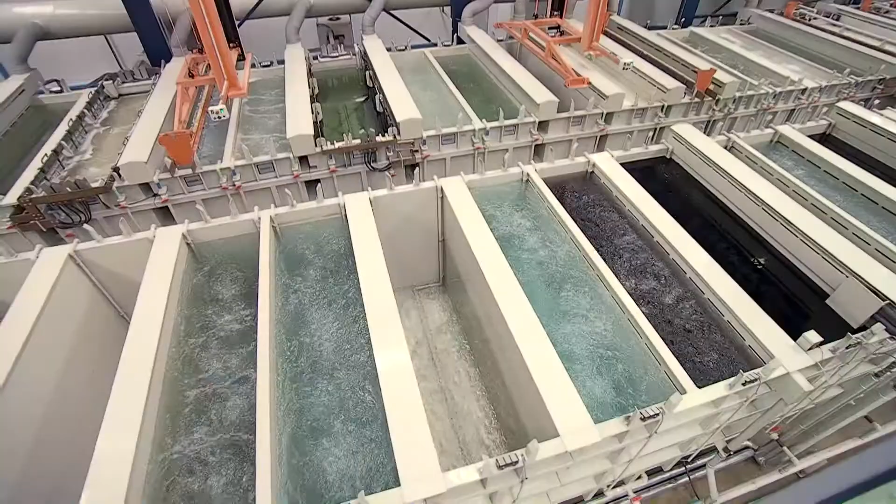Merging its 65-year sectoral experience under the roof of Sampa in 1994, the company specializing in heavy vehicle spare parts has established cooperation with international brands and has confidently adopted as its mission the manufacturing and service quality forever.

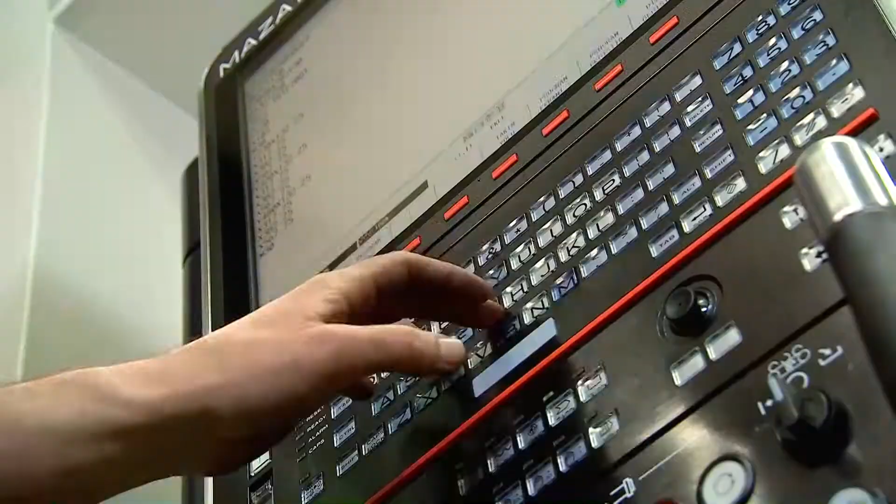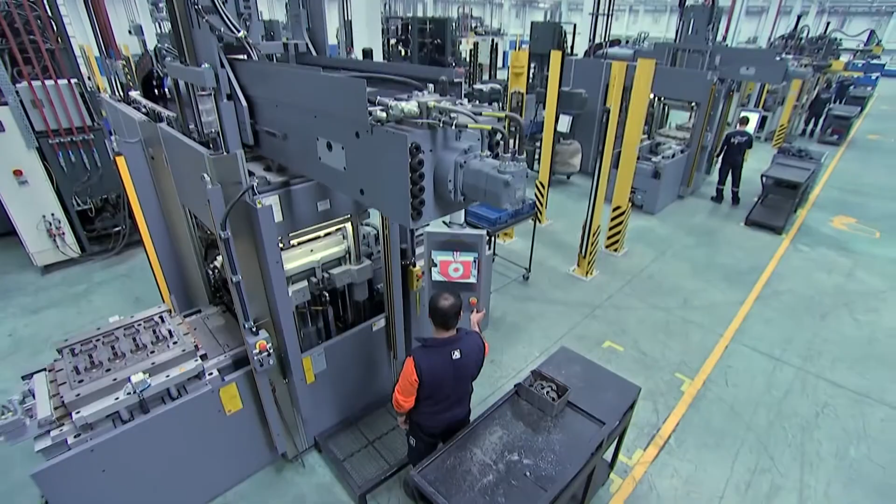700,000 square feet of production area. 1,080 employees, 144 of whom are engineers and technicians. Production for 18 different brands of European and American origin. Modern production units equipped with cutting-edge technology, consisting of more than 3,300 machinery. Offices in the USA, Germany, Dubai, Russia, China, Kazakhstan, and Ireland.

We promise to serve you many products with the best prices, highest quality, and the speediest due dates, under the supervision of an R&D Center which competes with the future, and with fully equipped manufacturing units which combine different and complicated production models under the same roof.

Let's now see the world of Sampa, opening its window to the future.

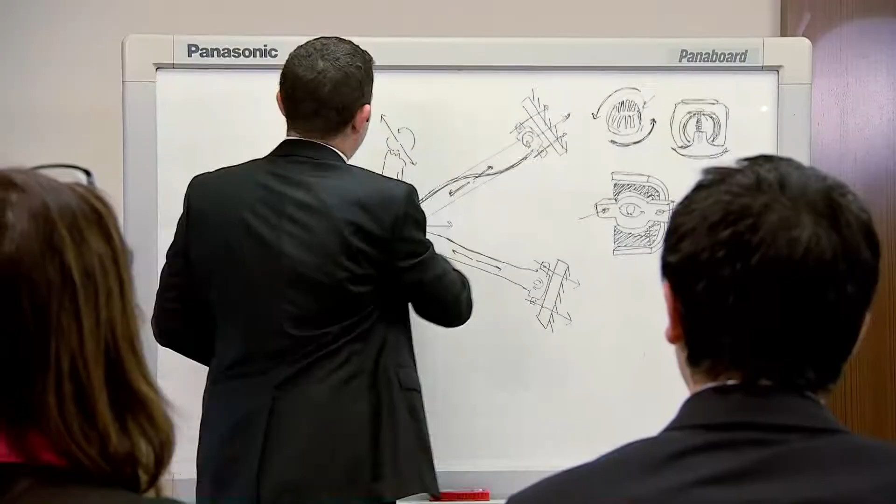Requests are transmitted to Sampa through OEM or aftermarket. It can be transmitted through OEM as projects which have ready technical documentation, or with the current structure to be developed, improved, or as joint venture projects which will be designed from scratch. Demands from aftermarket are actually carried out in the world of Sampa on the basis of advanced product realization by reverse engineering.

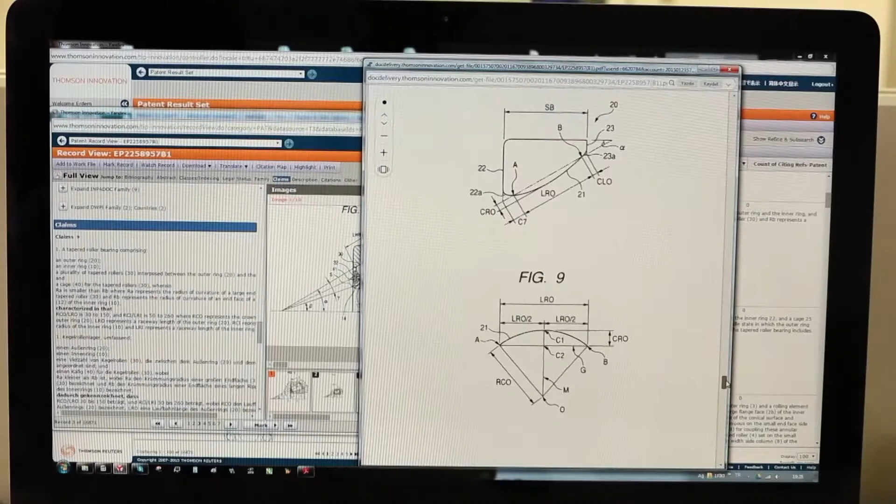The teams of specialists make extra patent investigations with the program named Thomson Innovation. If the product is patented, the design is submitted to the R&D department for revision and development to take it out of patent protection scope.

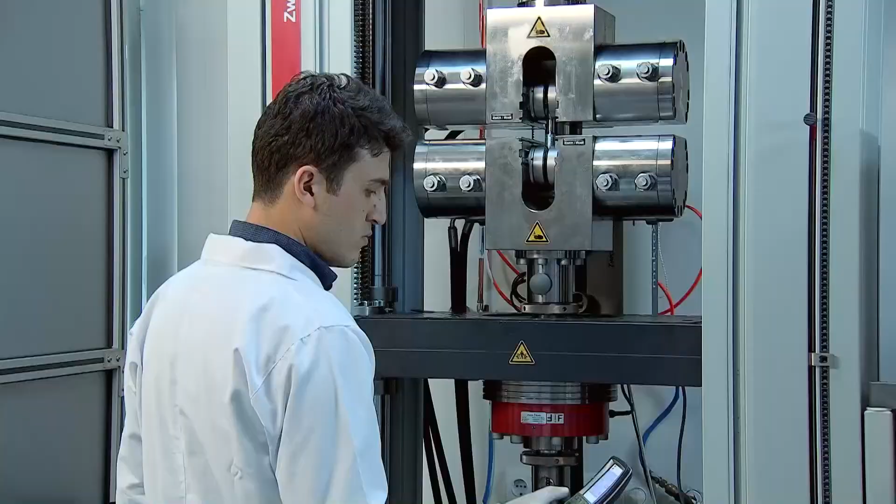One of the most developed R&D centers of the country: a 25,000 square foot office and laboratories where 77 scientists work, apart from the quality control laboratories established in manufacturing plants. 2.5% of the turnover is specially reserved for the R&D Center, which is accomplished with an investment of $9 million.

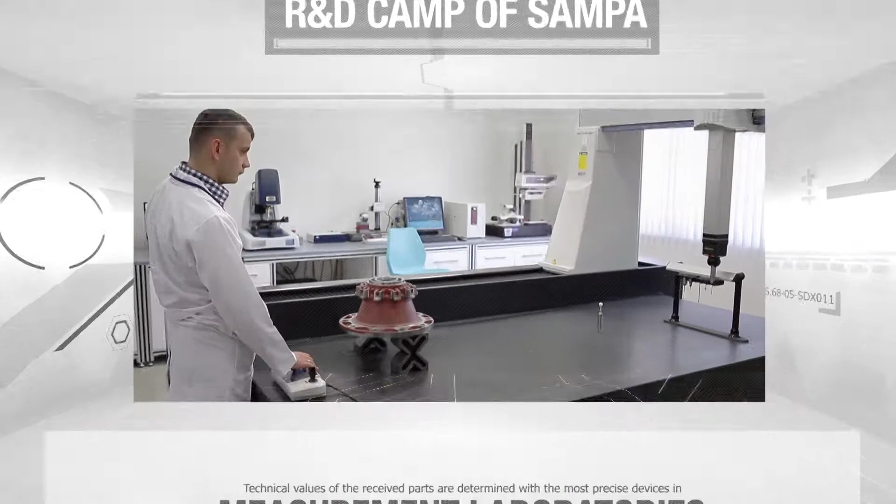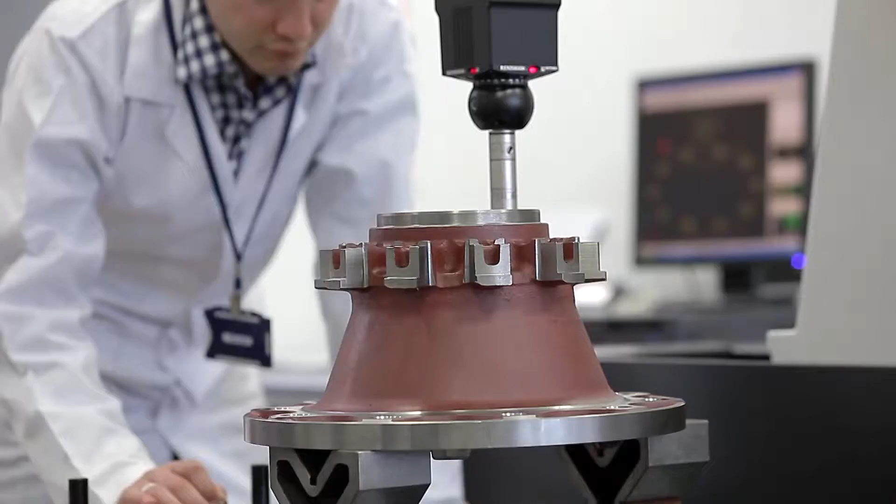Technical values of the received parts are determined with the most precise devices in measurement laboratories. Material characterization of the products is performed mechanically.

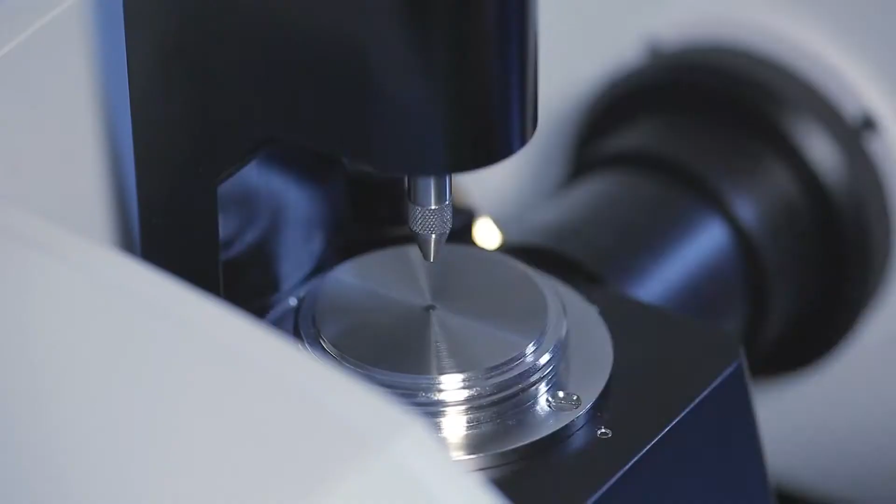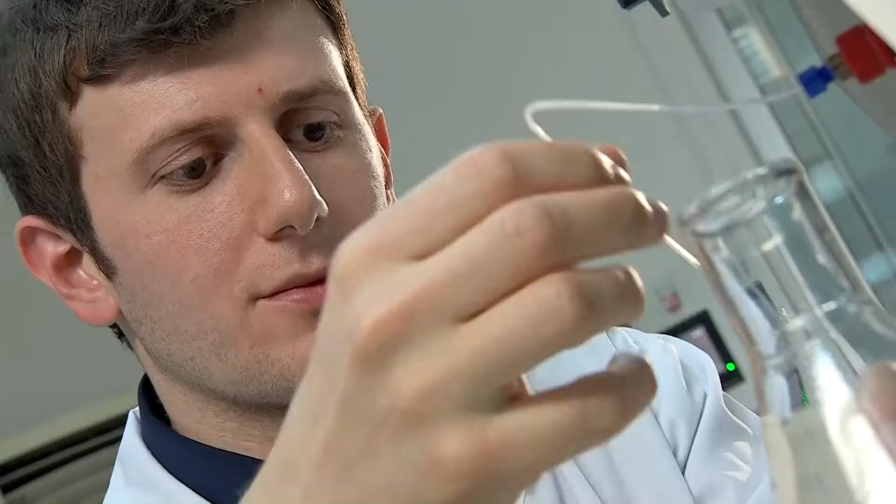If current material data is available on the CES Selector program, such materials are preferred. If new materials are required as a result of analysis, then new material designs are made in order to develop the performance of the products.

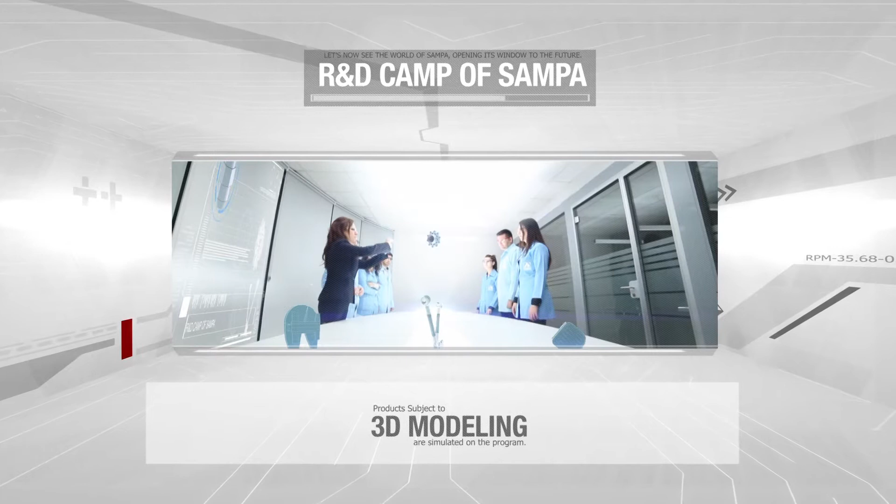R&D engineers analyze the results provided by the Measurement and Material Laboratory. Products subject to 3D modeling are simulated on the program. Thus, material and product design is verified.

Any obtained data is submitted to the engineering unit, and technical specifications and PPAP files are prepared.

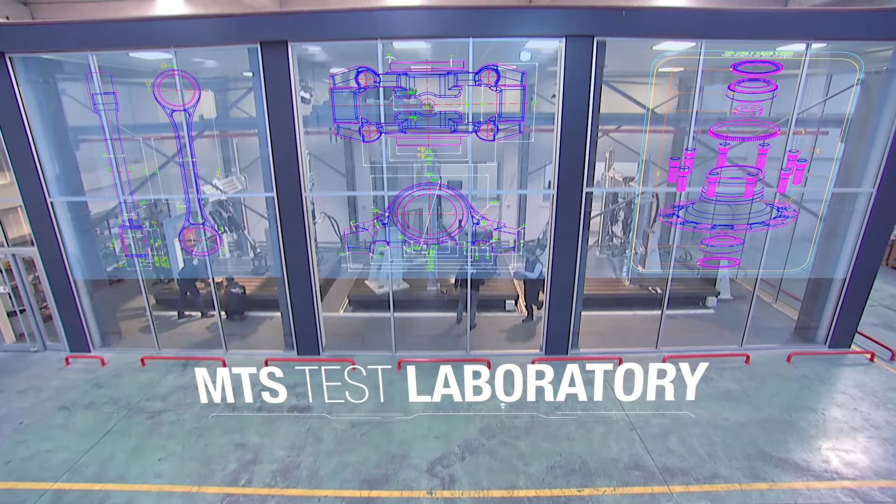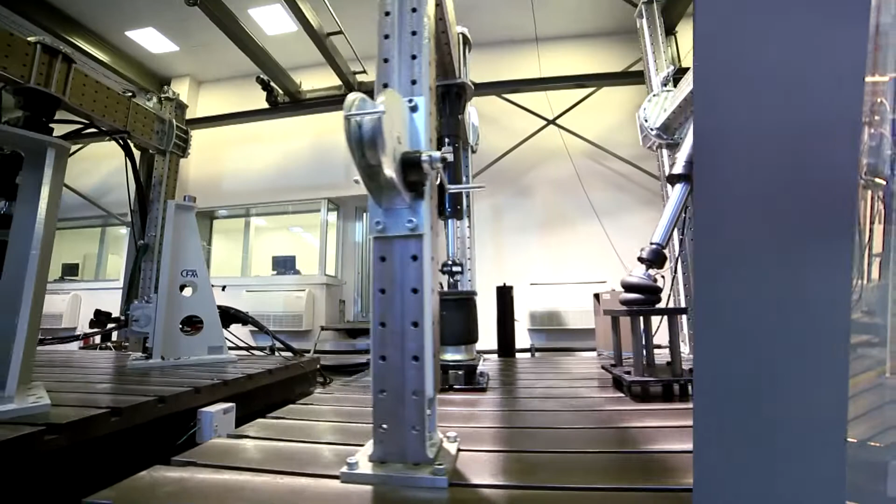Dynamic characterization of the product, which is subject to performance testing in MTS devices, is carried out by taking original operating conditions and simulation data into consideration. Dynamic characterization results here constitute data for benchmark.

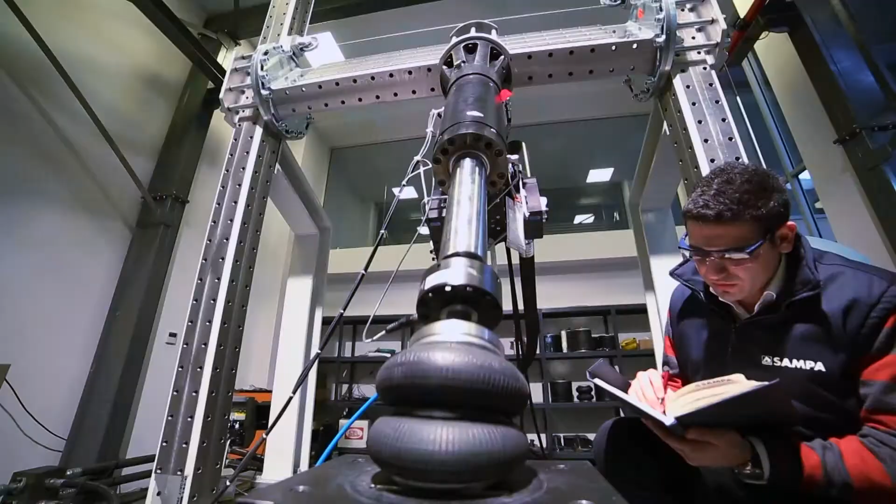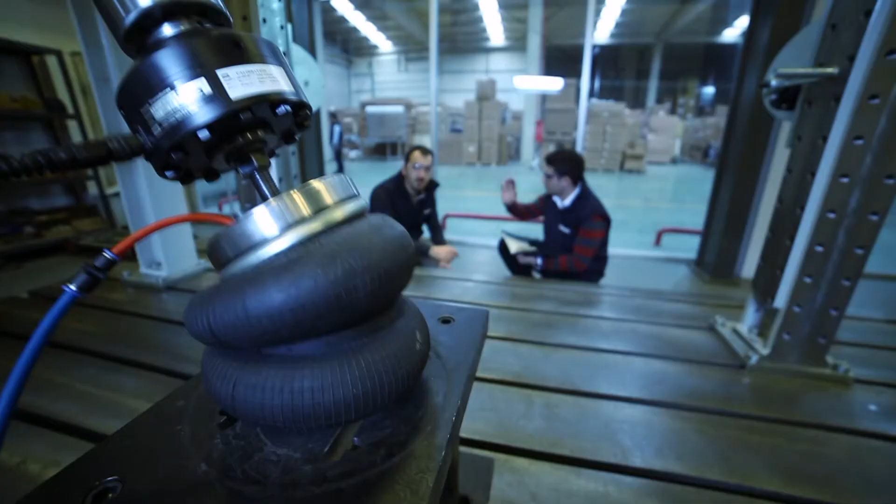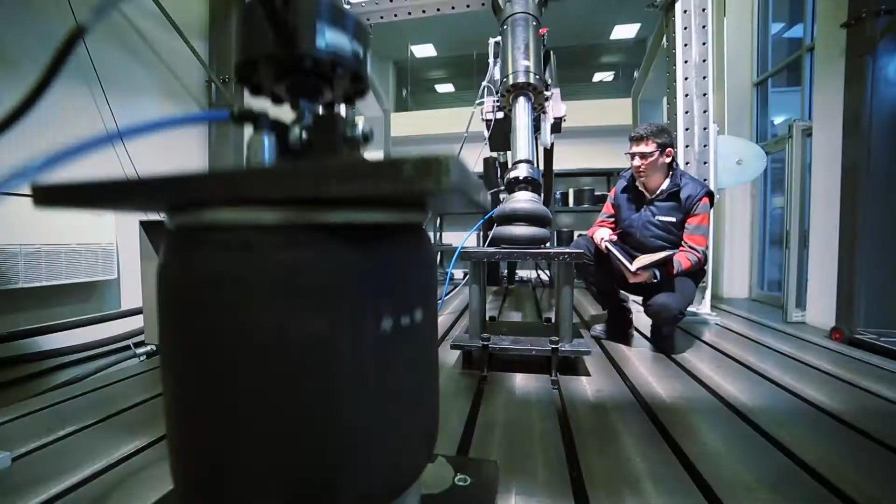Molding and process designs are realized for verified product designs. If the design is verified, startup is provided for the production. If there is a need for a prototype realization due to customers' expectations, prototype production for the product is realized with startup.

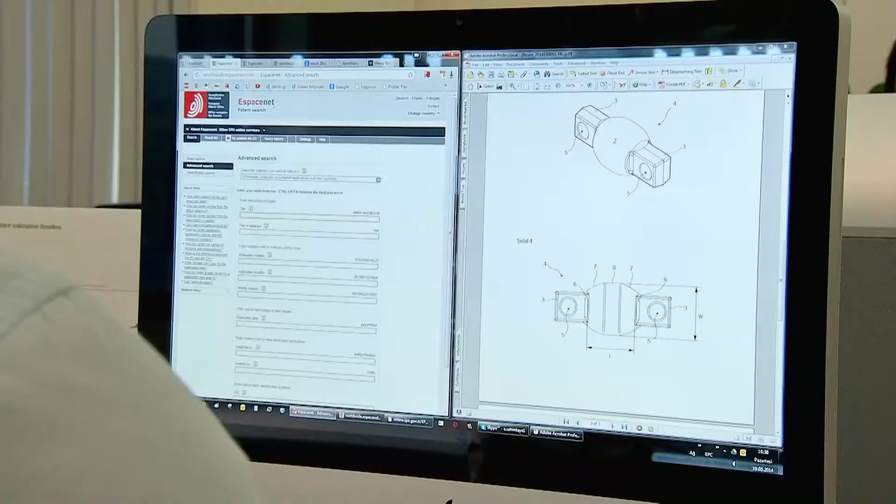Results obtained from dynamic test laboratories and design verification results are compared, and it is quantitatively revealed whether the design criteria and customer expectations are satisfied.

A benchmark report is created by comparing the test results of the original sample and the test results of the prototype product. These results are the commencement of the following phase. Verified or developed designs or products are on standby for production in mass production units.

Charming machinery, exciting digital panels, cutting-edge technology, and a gigantic production complex. Raw material input required for mass production is commenced through raw material supply from global partners through supply chain management.

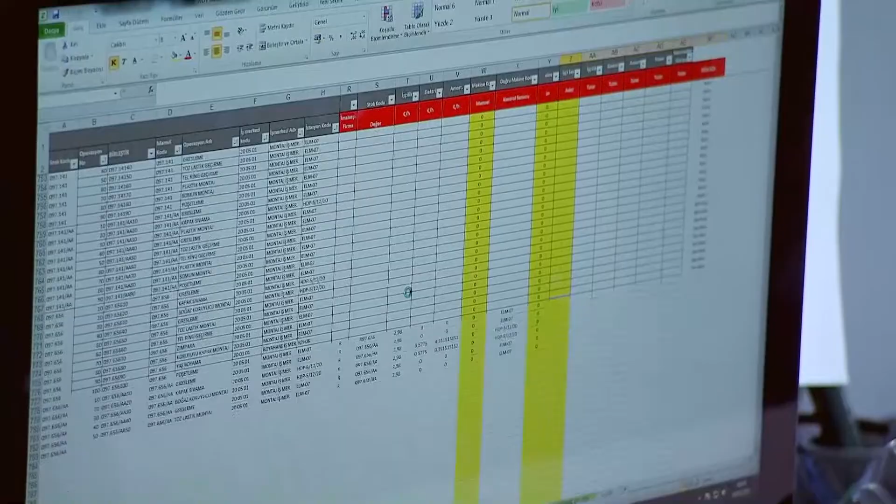Dream feeds the reality. The wheel starts turning when the dreams are transformed into a concrete goal: producing, supplying, and delivering, giving confidence at each step. Sampa has designed its production units with technology and quality focus too.

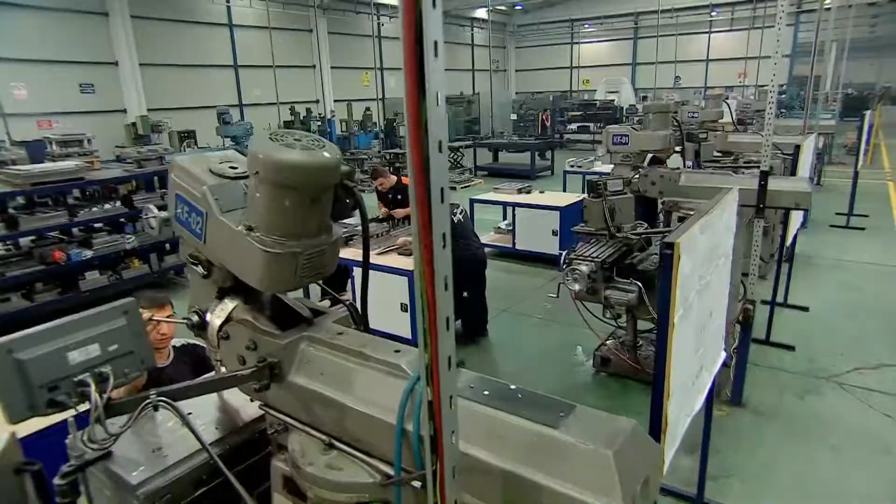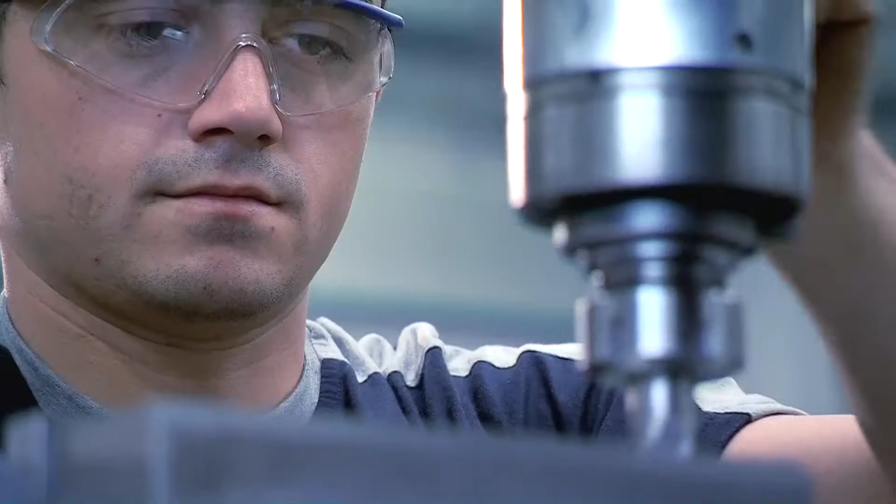The first step of the system is taken according to the directions provided by the R&D department and molding room. Relevant product mold, apparatus, or auxiliary equipment are tracked by mold product definition report and notification mails.

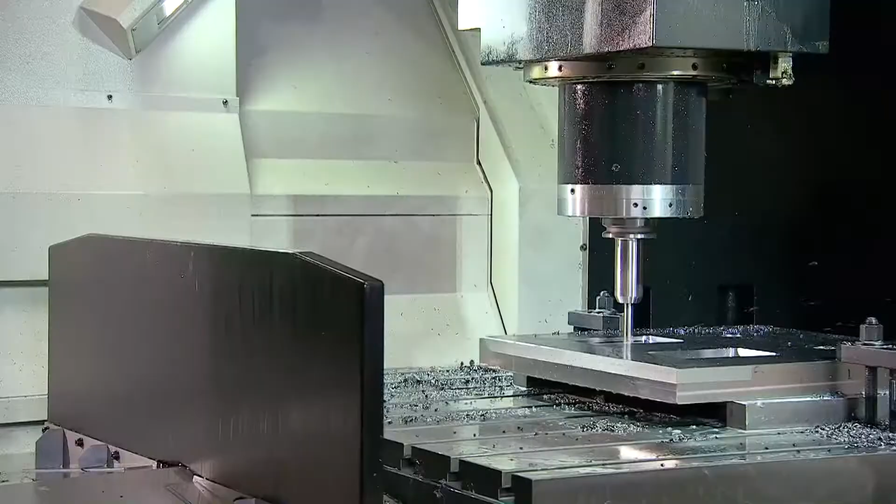Suitable steels are determined according to the type of mold to be produced, and molds in compliance with the specifications are produced. The result? If the products are suitable, the mold is delivered. If not, they are submitted to molding again for performing required corrections.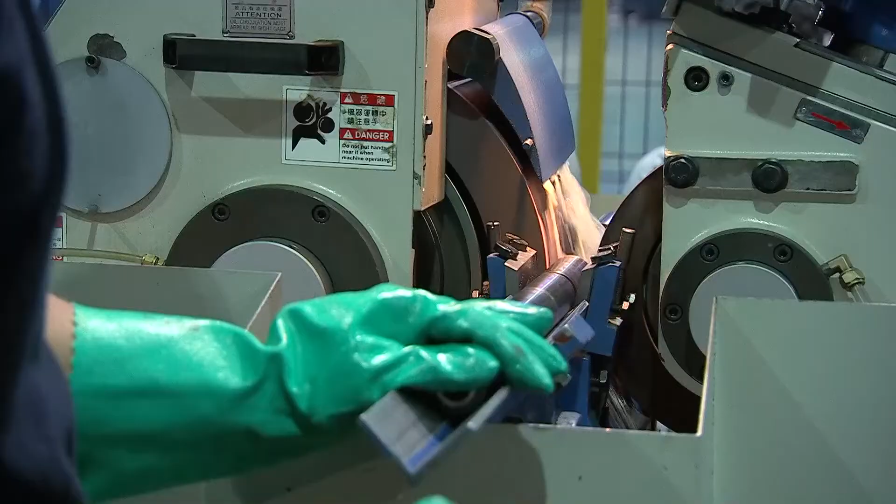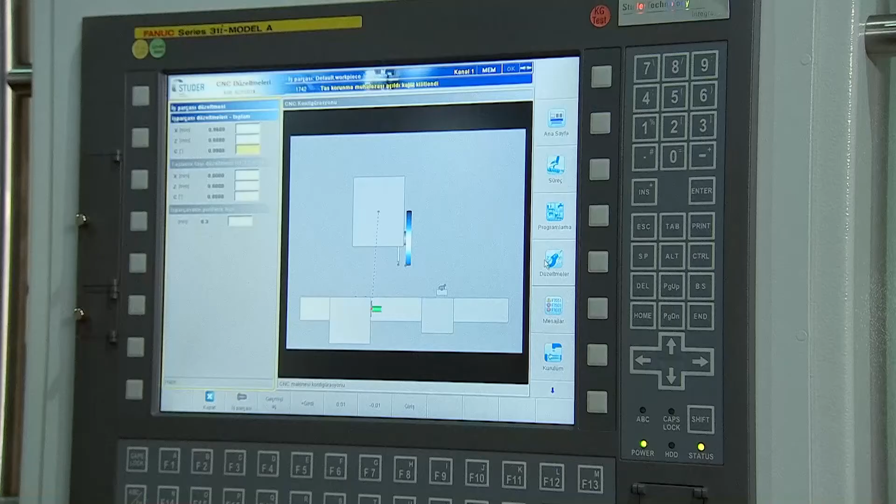Machinery, a magic created by humans during their adventure in the world. These mechanical fellows of the manufacturers are integrated with digital technology, and each step toward production is realized with a ceremony at Sampa.

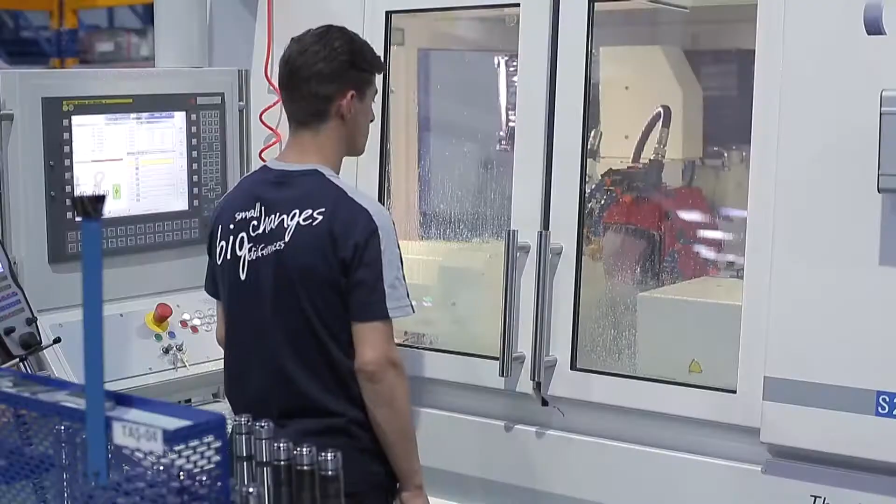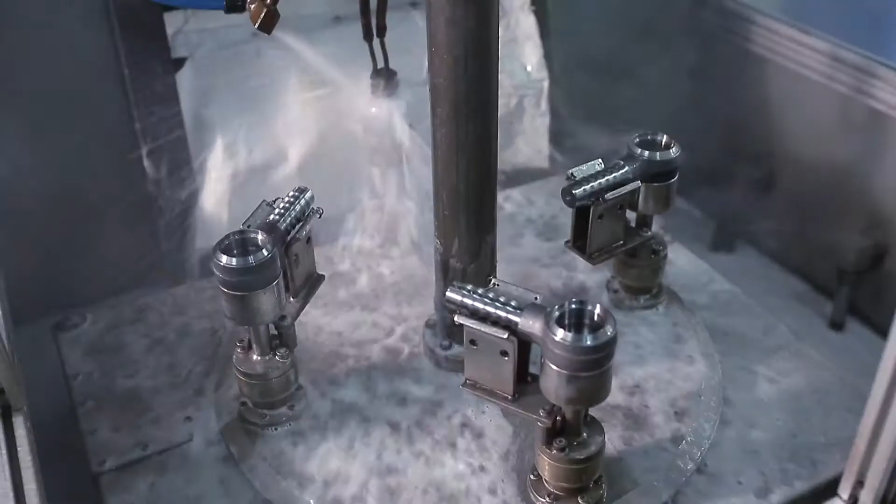Upon material input, quality control verification and preliminary preparation is carried out according to the CNC lathe plan. The initial product is machined upon starting up the prepared program, and dimensions are checked without removing the piece from the lathe. Upon performance of the measurements according to the process picture by the quality control unit, mass production is commenced upon obtaining verification.

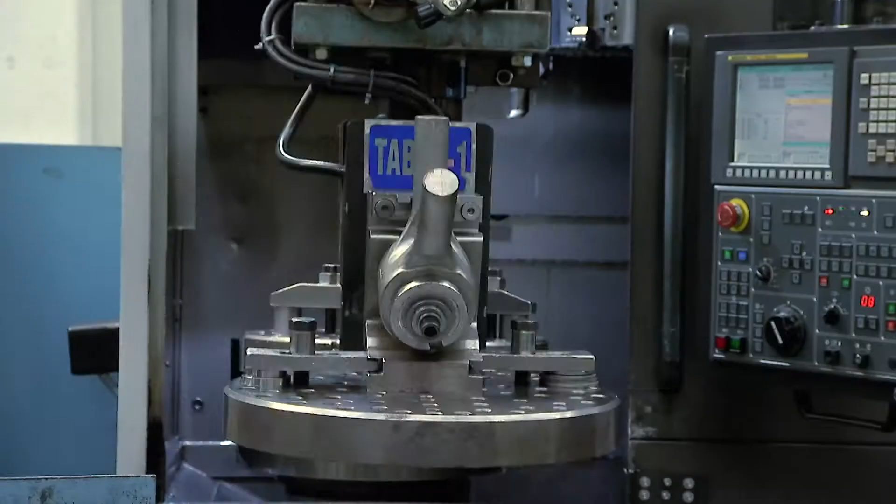The procedure, which is checked precisely at each stage at Sampa, is carried out as usual, naturally, by the teams who know what to do and where to do it.

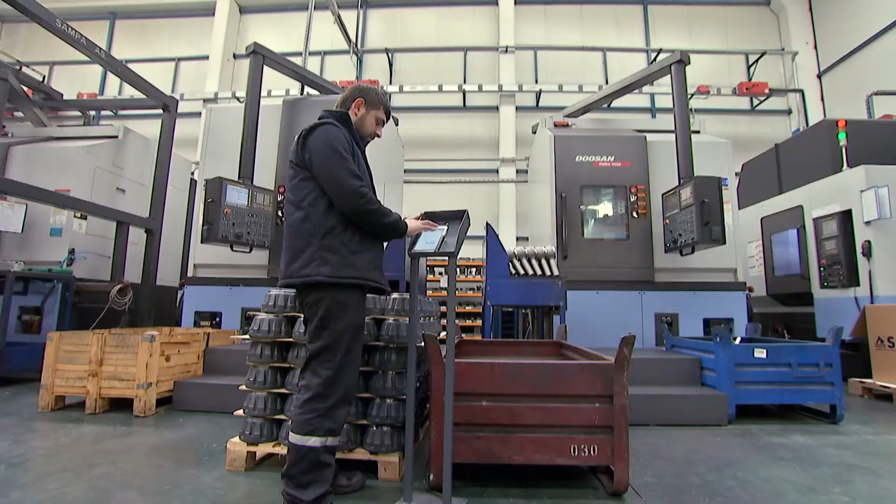Sampa uses SAP MII, the Manufacturing Integration and Intelligence module of SAP, which contains production tracking, machinery layout, and maintenance forms in order to ensure continuity of this healthy operation.

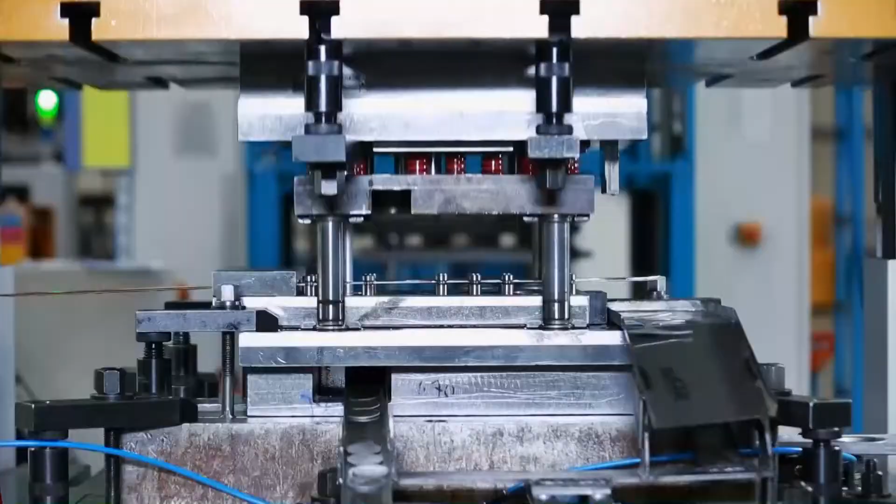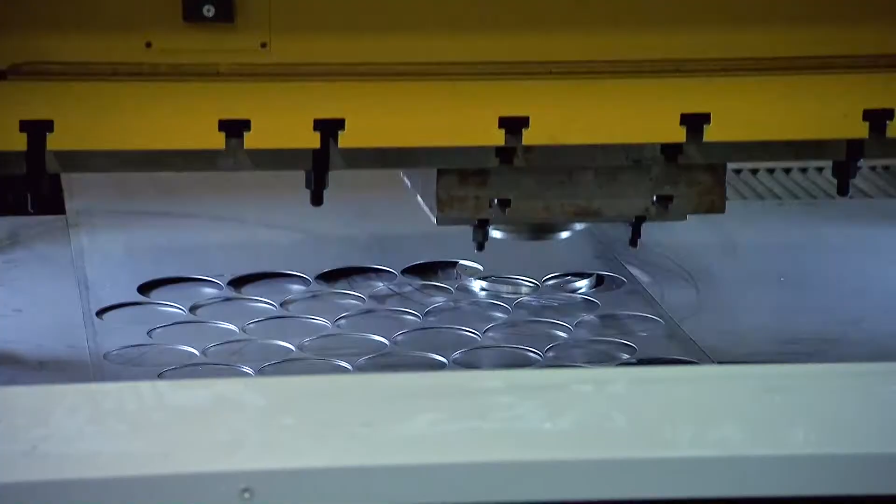Suitable plate or rolled metal sheet is manufactured for production items included in the planning, according to a cutting plan prepared based on quantity and mold. Input productions in the work order are provided to the operator, and processing is started to shape the metal sheet.

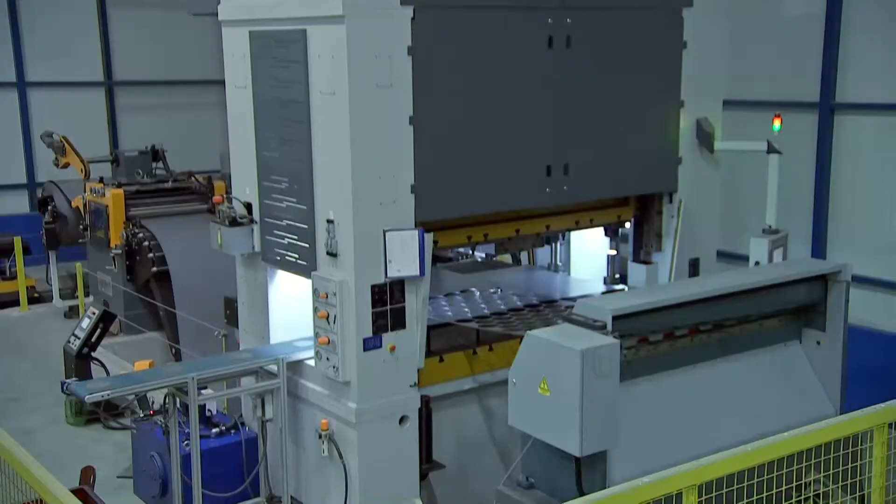Periodical quality controls are not skipped during production. The final result is obtained by connecting other molds to the respective presses according to the route of the product. Here, the operator completes production tracking forms after each process. Completed products are delivered to the warehouse upon being subjected to a final check.

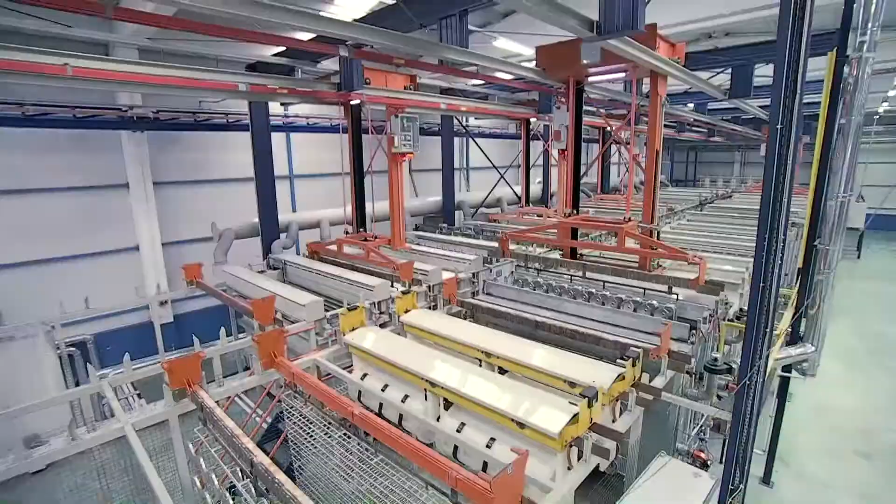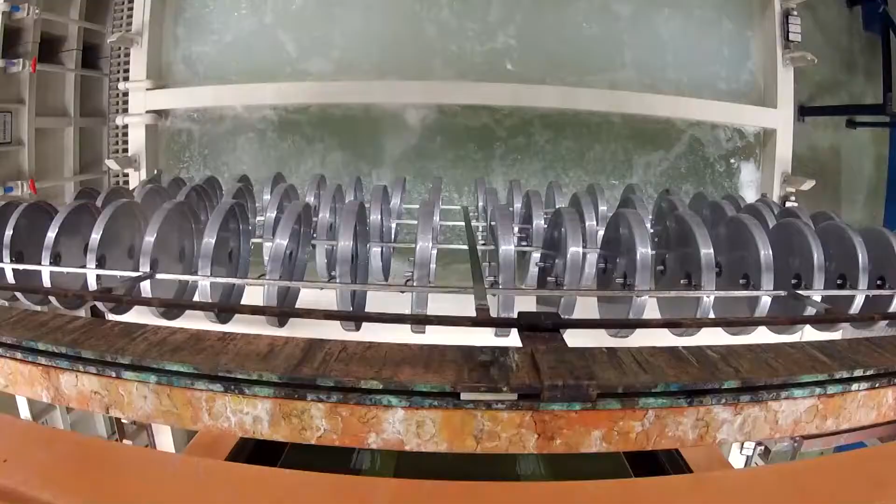An extensive surface finishing facility, comprising zinc phosphate, iron phosphate, alkali zinc, zinc nickel, sandblasting, chemical paint, and degreasing machinery, is arranged with emphasis placed on environmental, work, and worker health, like in other machinery groups of sampa.

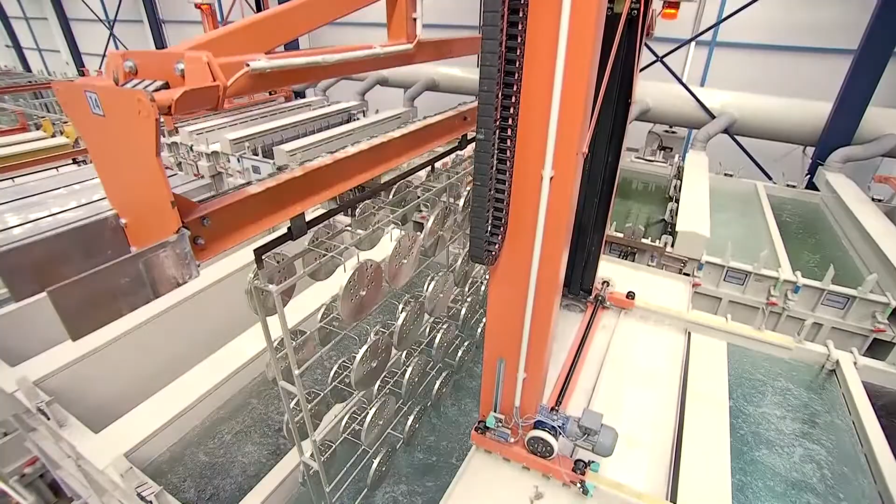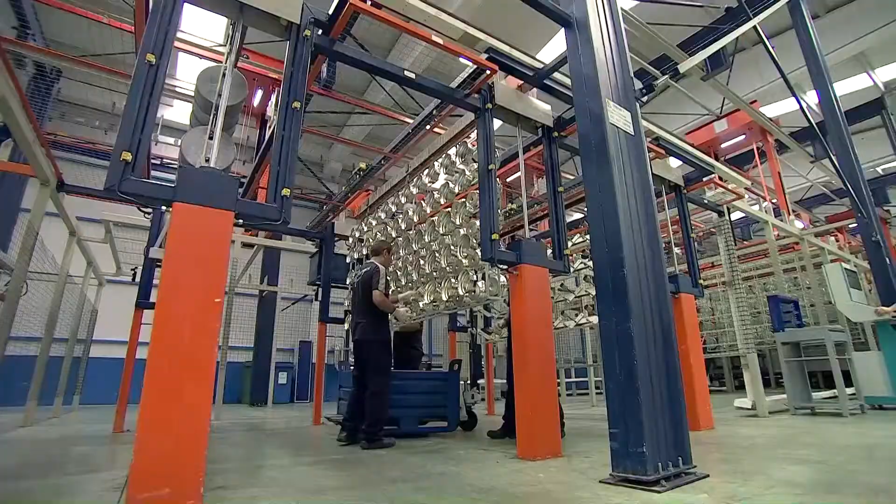Using the leading coating chemicals of the world, sampa works with a maximum corrosion resistance goal for its automotive products. It can perform salt tests, coating thickness measurement, and material analysis in the laboratory it has established in order to check the standard and keep it at the utmost level.

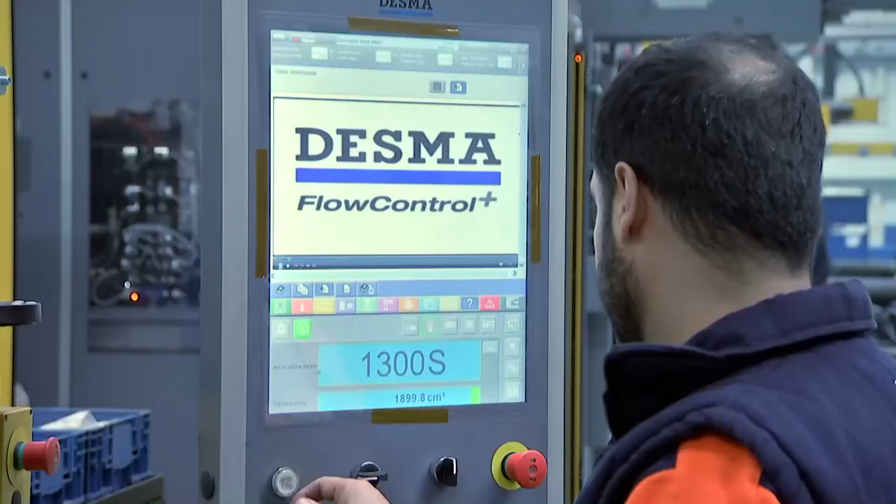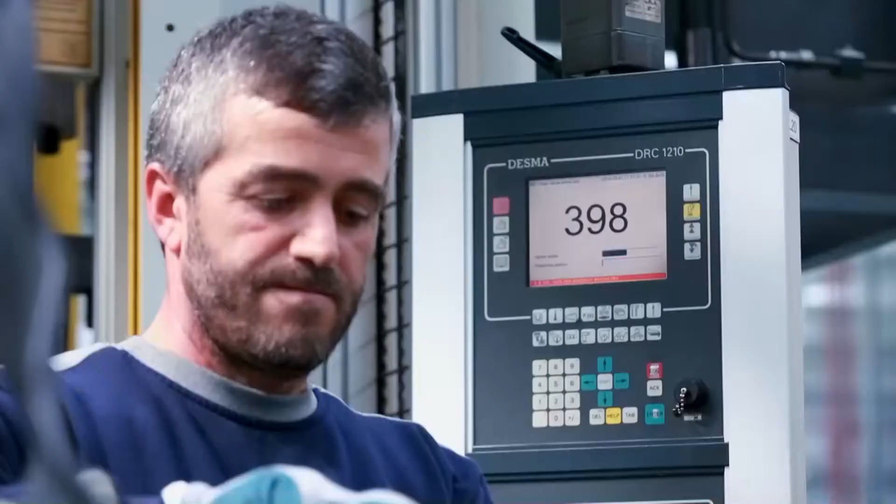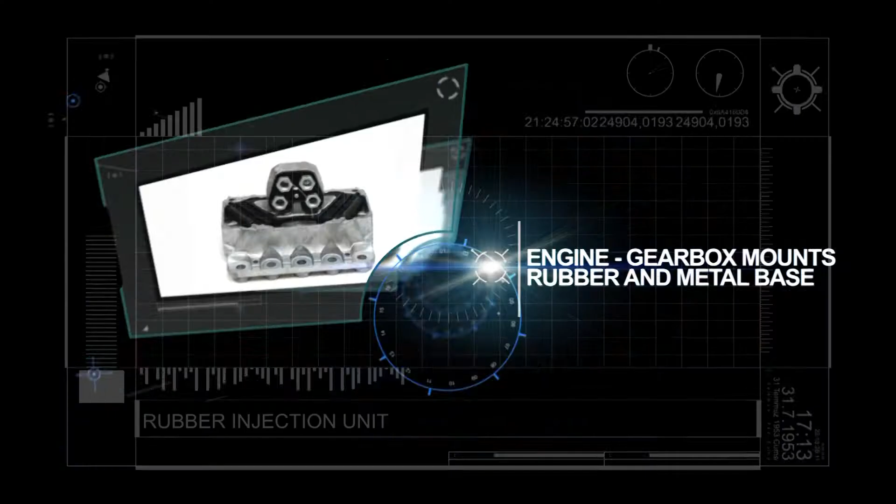On rubber injection molding machinery, product molding conditions are recorded in memory, and a ready-to-use program is created for future operations on injection machinery, which are connected with molds at temperatures of 320 to 338 degrees Fahrenheit. Machinery settings are performed according to type of compound, product weight, and mold runner system for new products.

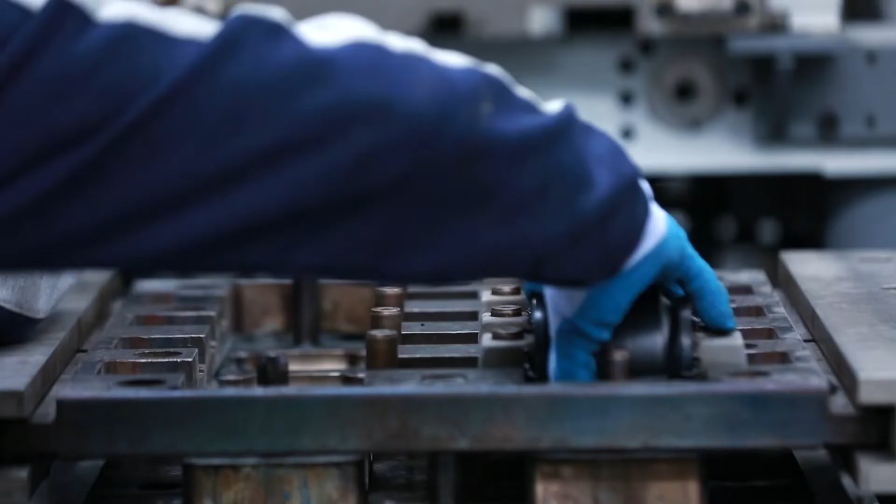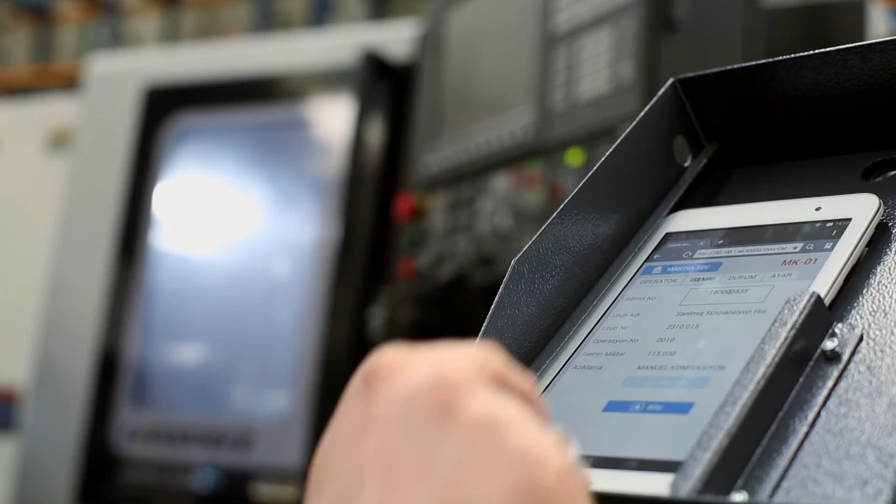Semi-finished products, which are subjected to surface finishing, are molded following machinery settings and subjected to verification by quality control. Upon verification, the product, molded in quantities according to the work order, is delivered to other production lines for the specified operations.

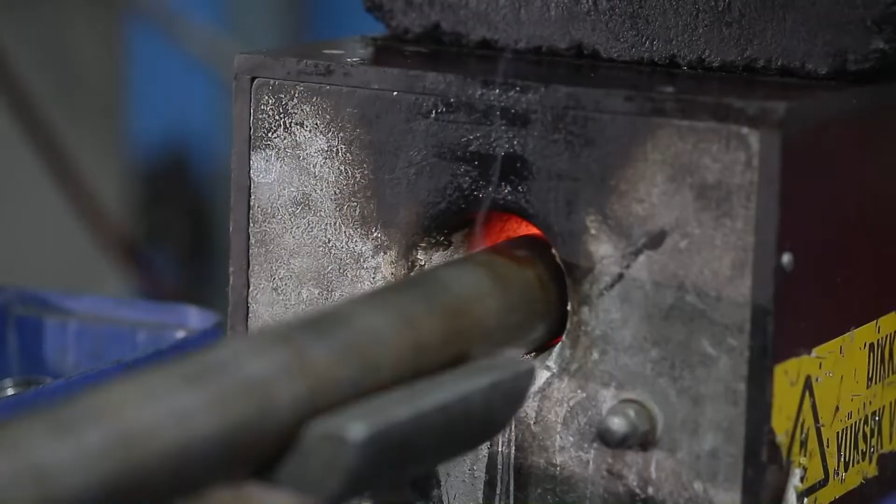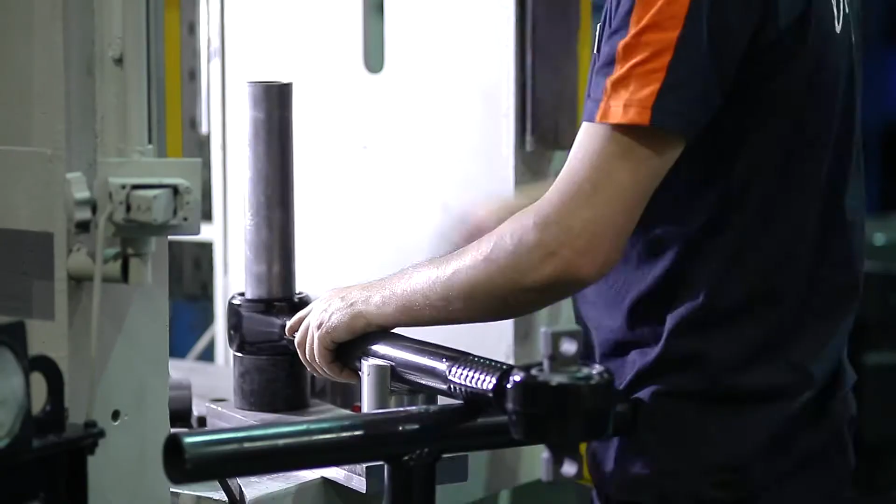Pieces delivered from different production units are shaped at the sampa V-arm department. Diameter and rear section processing is realized during the rear section processing and main processing phases of the V-arm. For centering, products are connected to the drilling bench using suitable tools. The tie rod body is subjected to centering following diameter and rear section processing.

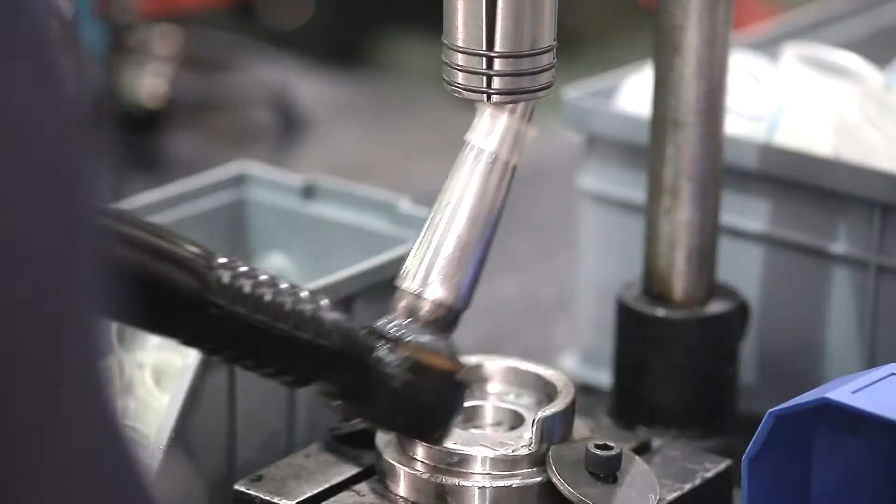Interior diameter hardening process is carried out on the induction bench following tip processing.

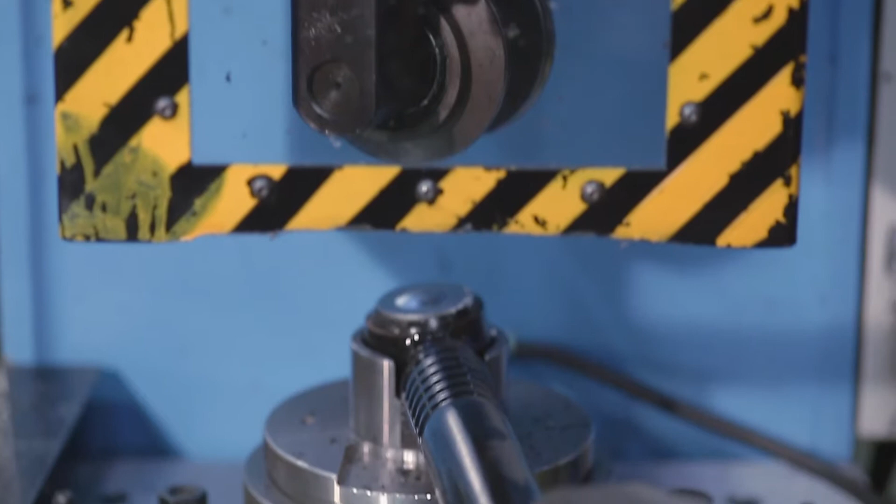The procedure, which is checked precisely at each stage at sampa, is carried out as usual, naturally, by the teams who know what to do and where to do it.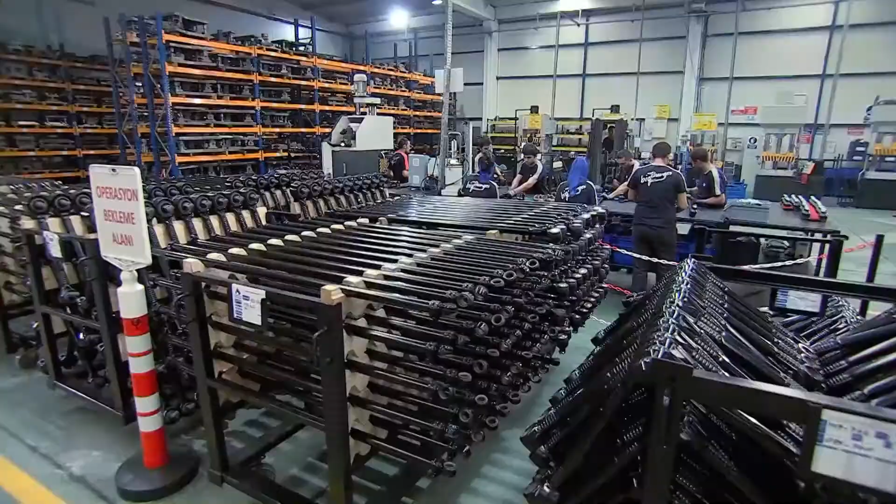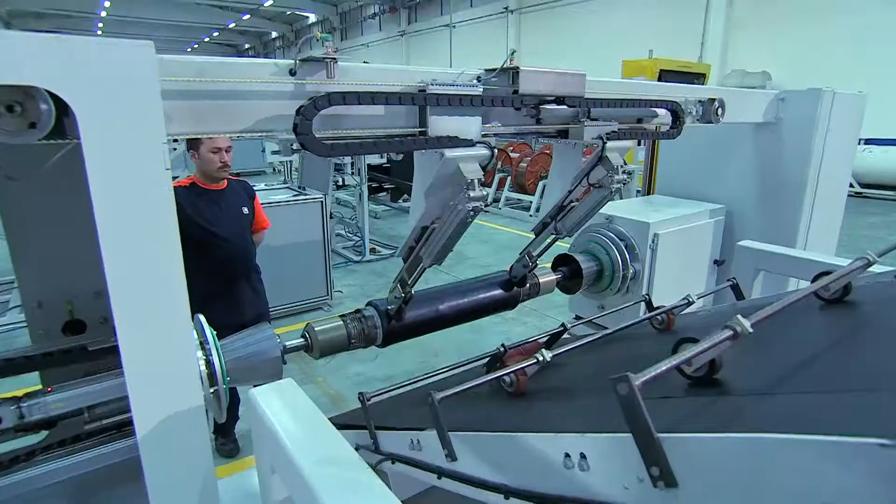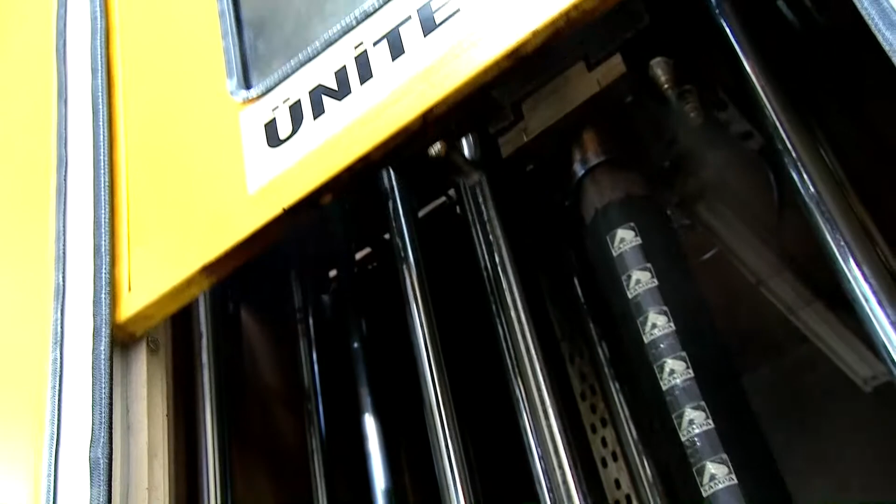Primarily, cord fabric and rubber compounds are cut according to the dimensions on the operation cards for the production of cabin bellows with or without suspension. Prepared hoses are cut to the length dimensions of the bellows to be produced and then introduced to the assembly line together with required bushings, rings, metal sheet, and plastic semi-finished products.

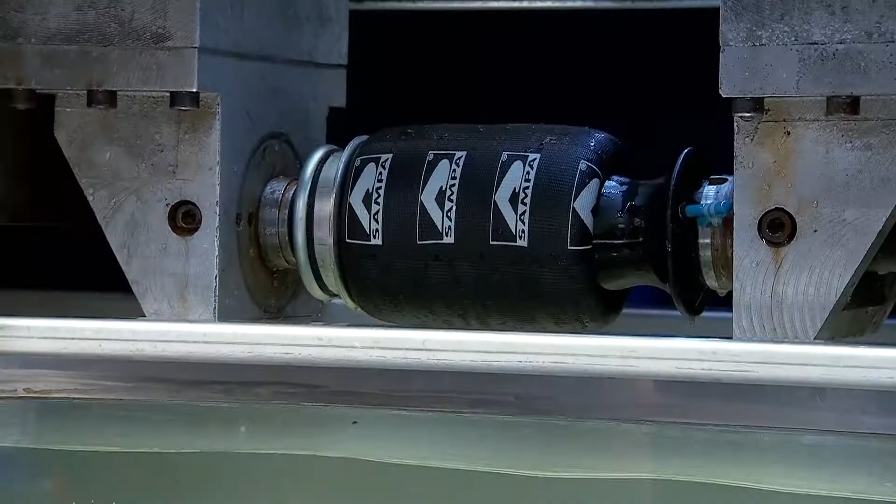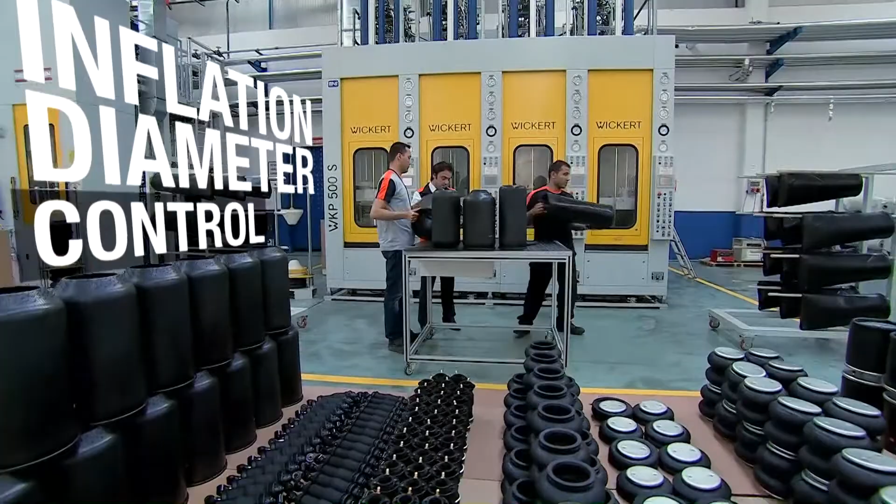Following assembly, products are subjected to a leak tightness test at 3.5 bar and a folding test at 7 bar. The products are also subjected to inflation diameter control at the test device. In manufacturing suspension bellows with or without piston, in addition to airbags, the unit never ignores the priority of quality at any detail, including textile support to the wire.

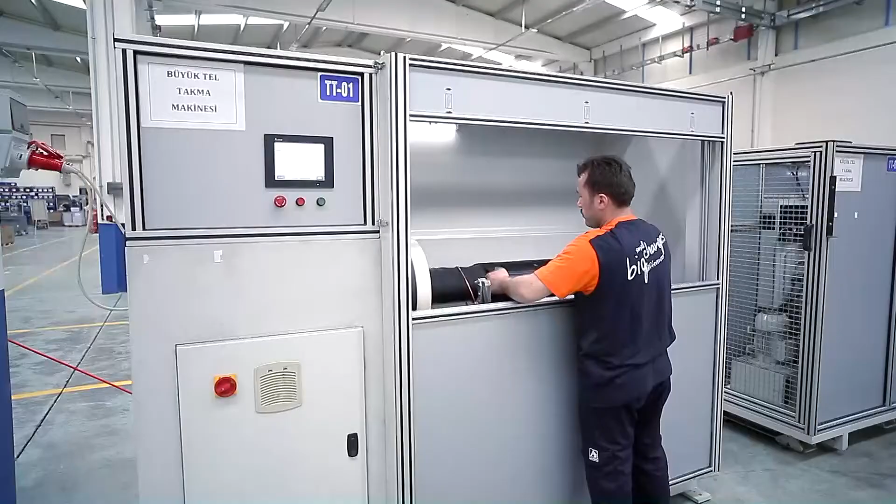Emphasis on quality is placed at each stage, from supply to design, from production to shipping. In other words, insistent quality control checks are all about sampa.

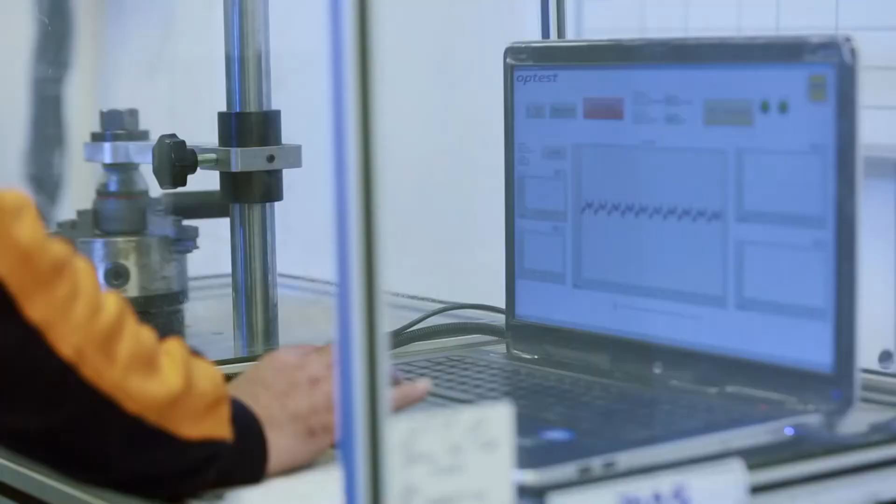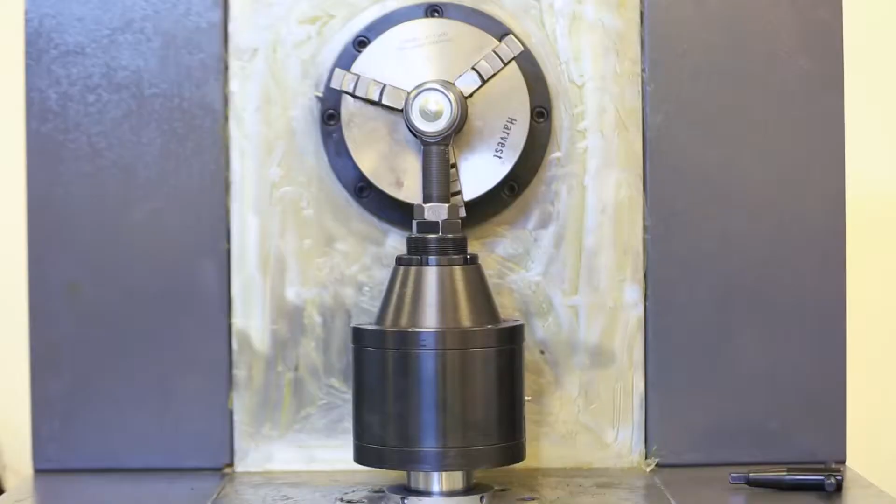Quality control processes, specially designed for each manufacturing process, are applied in all units at sampa. These processes are repeated periodically at the beginning of production, during, and at the end of the process, pursuant to national and international standards and the ethical values for automotive product manufacturing. Quality laboratories at sampa are located in the production facilities, separate from the R&D campus.

We adopted the quote of Marcel Proust as our motto. We are striving to see each product from a new perspective and create difference with our work, and to add value to life. Come and discover the world of sampa.